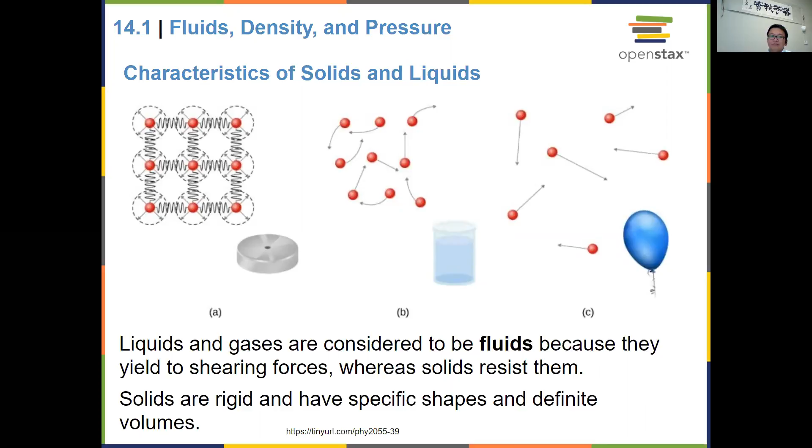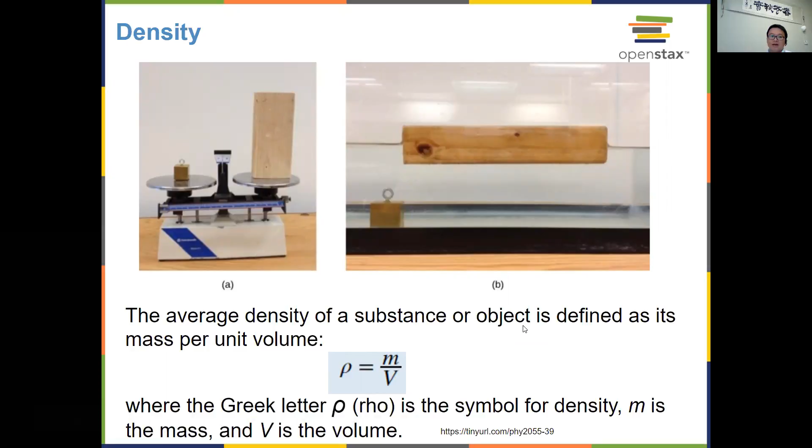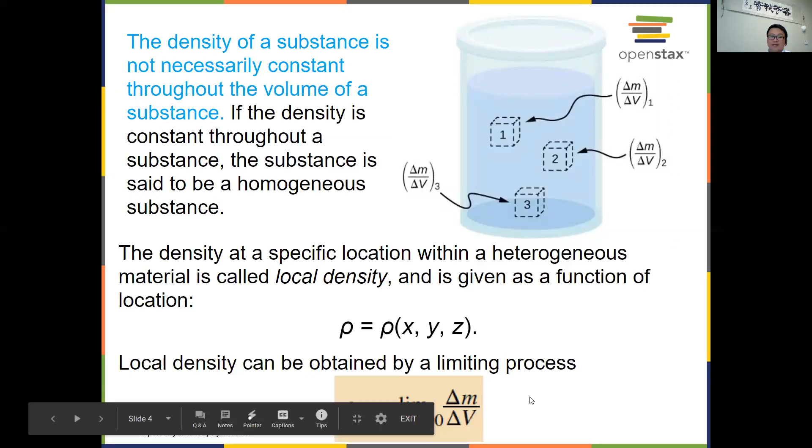We also briefly mentioned the definition for density: density equals mass divided by volume. Density can also be localized, meaning that at a particular local point, your density may vary from other locations. You take a small delta m divided by delta v at that small location, take the limit as delta v goes to 0, and that gives you the local density.

Another term related to density is specific gravity. It's a unitless quantity—the density of the material divided by the density of water at 4 degrees Celsius under normal 1 atmosphere pressure. Keep in mind that when we talk about density, it has to be specified at what temperature and under what pressure—those two conditions have to be specified. Otherwise, if not specified, we're talking about normal room conditions, assumed to be 1 atmosphere and room temperature.

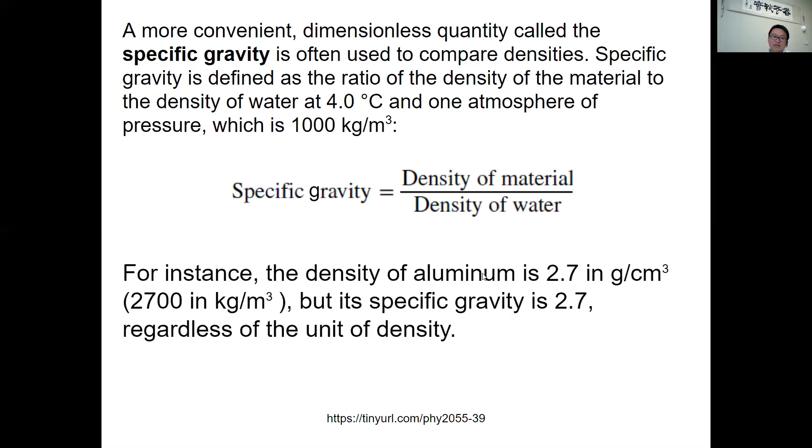We also looked at the definition of pressure as force divided by area. Pressure can also be localized, so at different locations you might experience different pressure. Then you'd be doing the derivative of F divided by the derivative of area.

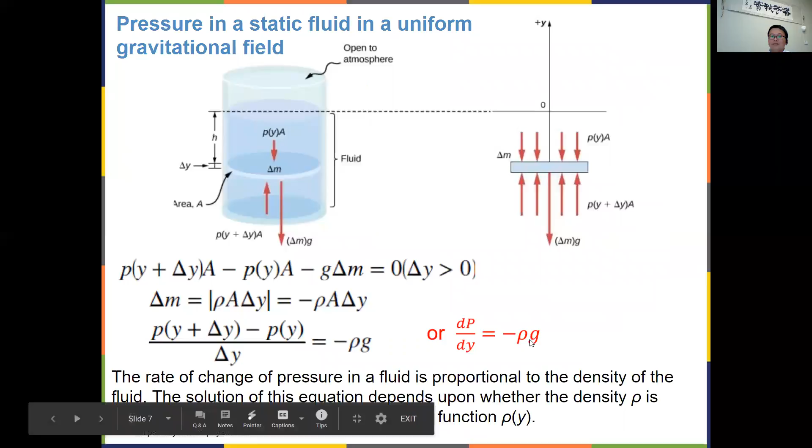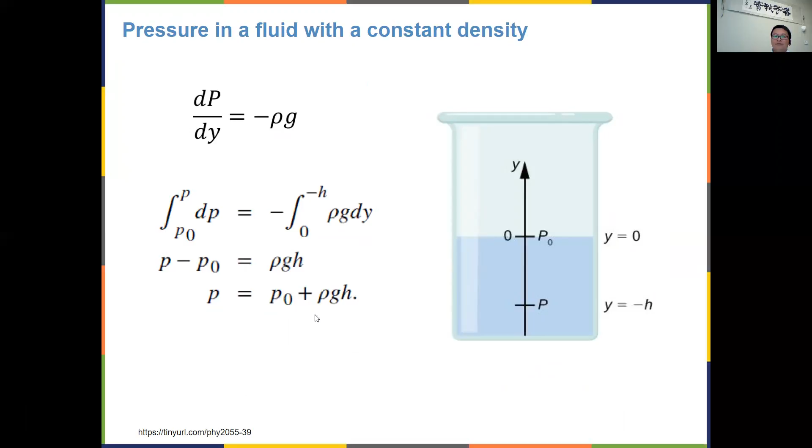Inside a fluid, the pressure varies with location, or with vertical height, due to the weight of the different parts of the fluid exerting on the lower part. So dp over dy equals minus g times rho. That gives you the pressure in the fluid assuming constant density, not changing too much. So pressure inside the fluid equals the pressure on the top surface of the fluid, plus rho g h. That's the pressure inside a fluid.

In the atmosphere on the surface of the Earth, pressure is given by the weight of the air divided by the area at the bottom. The pressure of air decreases as altitude increases—if you go up a very high mountain, you'd expect the pressure to decrease at the top.

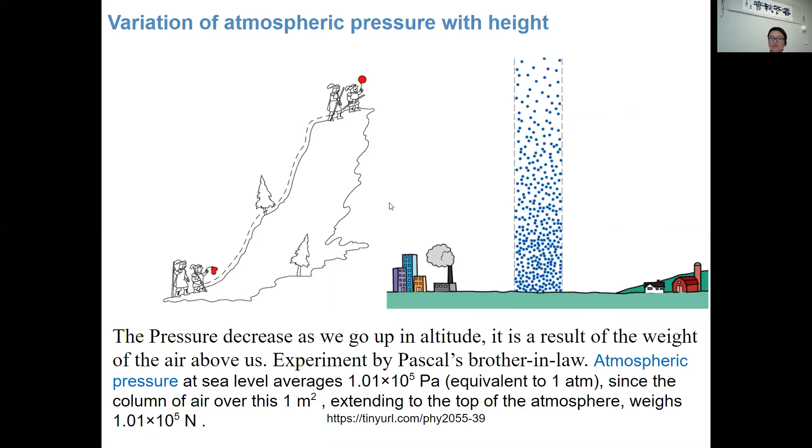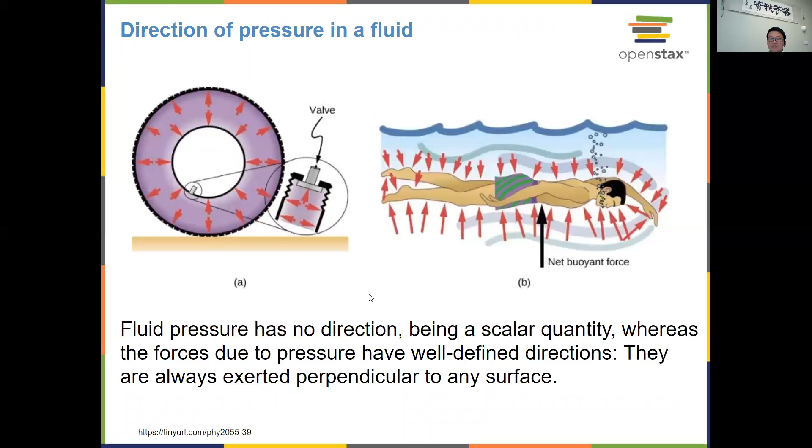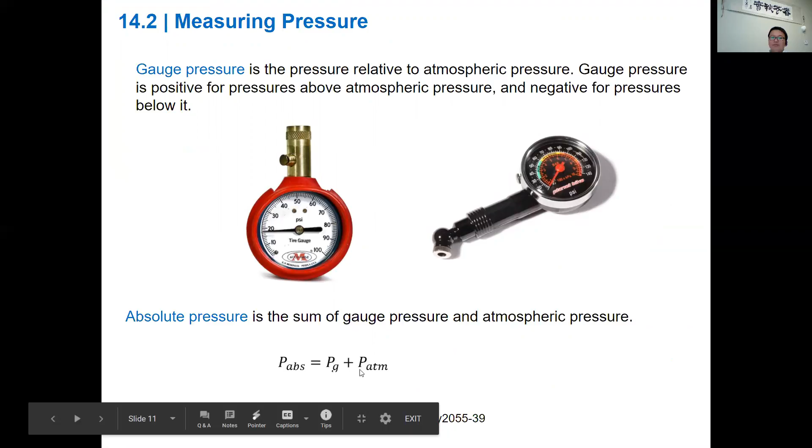Pressure inside a fluid acts in all directions, or we can say no particular direction, so we treat pressure as a scalar quantity. The device used to measure pressure, called a pressure gauge, measures relative pressure instead of absolute pressure. So to calculate the absolute pressure, you do P from the gauge plus P atmosphere.

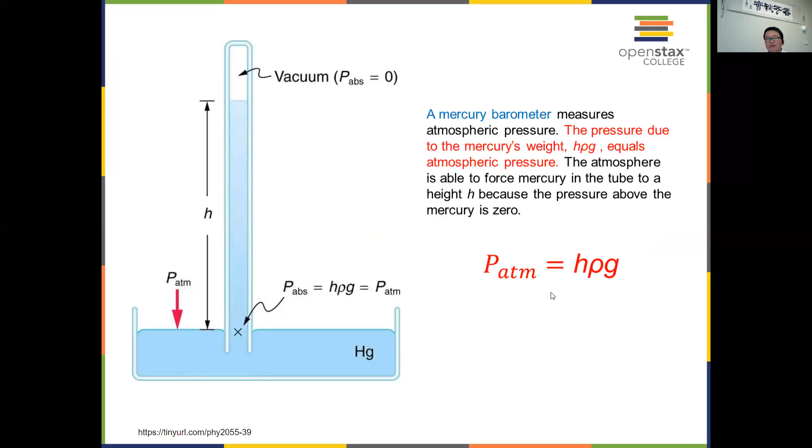In chemistry, pressure is often measured by a barometer—a device like this; we actually have a mercury barometer in the lab that you'll use next semester in physics two. Because mercury is the fluid, pressure equals rho g h, or h rho g, in the same sense. We also mentioned Pascal's principle and hydraulics.

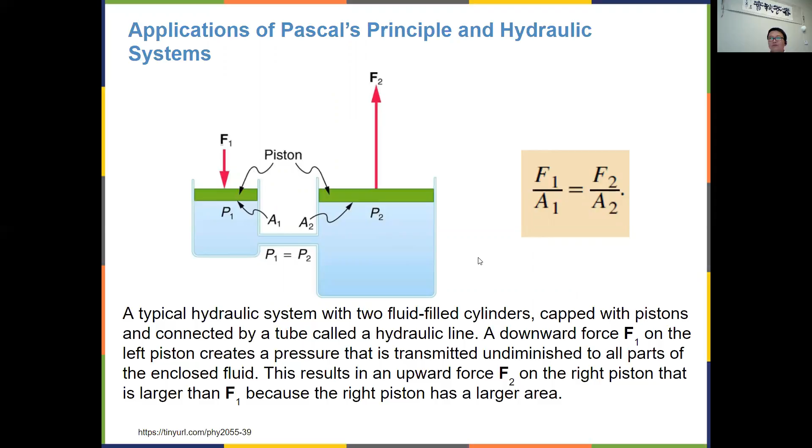Pressure inside the fluid acts in all directions and is uniform throughout. So if you have a change on one side, all other locations inside the fluid should experience the same change in pressure. In that sense, you can design a hydraulic device where you apply a small force and get a relatively larger output force. That's what we learned last time.

Today we'll keep checking a couple more sections in this chapter. The first thing we'll look at is called Archimedes' principle and buoyancy. We know boats usually float in water, while heavier objects like metal sink. Similarly in air, a balloon filled with helium can float. All these objects experience buoyancy forces, an upward force opposite to the direction of gravity.

The origin of the buoyancy force is that when an object is partially or fully submerged into a fluid, the pressure inside the fluid varies depending on the height you are at. For example, with a cylindrical object inside the fluid, the pressure at the top is less than at the bottom. So if the bottom has the same area as the top, the bottom experiences a larger force than the top.

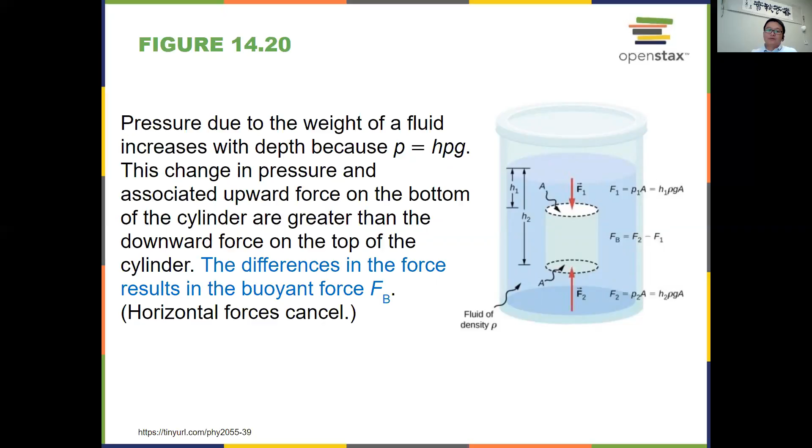Any object inside the fluid should also experience buoyancy in that sense. Now you may have an irregularly shaped object, but if you consider the top half and the bottom half of the object, you can find the difference in forces, which gives you the buoyancy force.

The buoyancy force was originally discovered by Archimedes, and you might have heard the story. The king at that time had a crown made by someone, and he suspected the crown wasn't made of pure gold. So he asked the wise man Archimedes to determine if the crown was made of pure gold or not. But Archimedes didn't have the idea initially, so he kept thinking about it.

One day he was taking a bath, and as his body merged into the water, water came out of the bath. Then he got the idea that you can use buoyancy force to determine this. He realized the buoyancy force acting on an object is equal to the weight of the fluid displaced. That's the principle he discovered, and he applied it to determine the density of the crown, which told him whether it was pure gold. We'll see about that in a couple of slides.

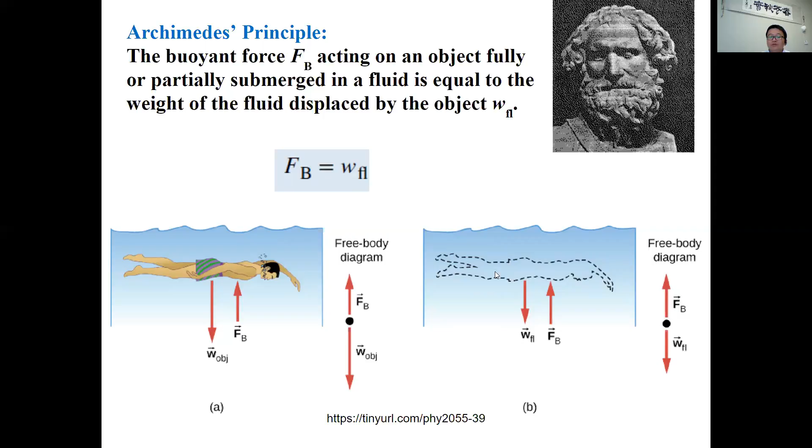Basically, buoyancy force equals the weight of the fluid being displaced. For example, if you're swimming underwater, the buoyant force the water exerts on your body equals the weight of the water displaced by your body. That amount of water's weight will equal your buoyant force.

Let's see how you can determine density by applying Archimedes' principle. If you have an object in water, the weight of the object can be written as mass times g, which equals the density of the object times volume times g. For the fluid displaced by the object, that equals the mass of the fluid times g, which equals the density of the fluid times volume times g. According to Archimedes' principle, the buoyant force should equal the weight of the fluid displaced.

So if you put an object into water or any other kind of fluid, if an object is floating, then these two should be equal to each other. So rho object is not equal to that. Depending on the density of the object, it could have density larger or smaller than the fluid. For a boat, the density of the boat overall should be less than the fluid, so then it's floating.

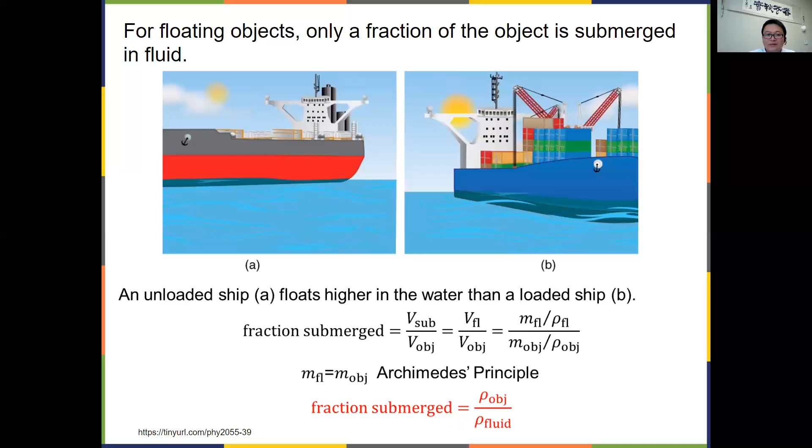If the density of the object is less than the density of the fluid, then it's going to be floating, because the fraction submerged would be less than 1 — meaning only part of it will be in the water. If the object has a larger density than the fluid, then the object will be sinking down, because the portion submerged will be greater than 1. That means it's going down.

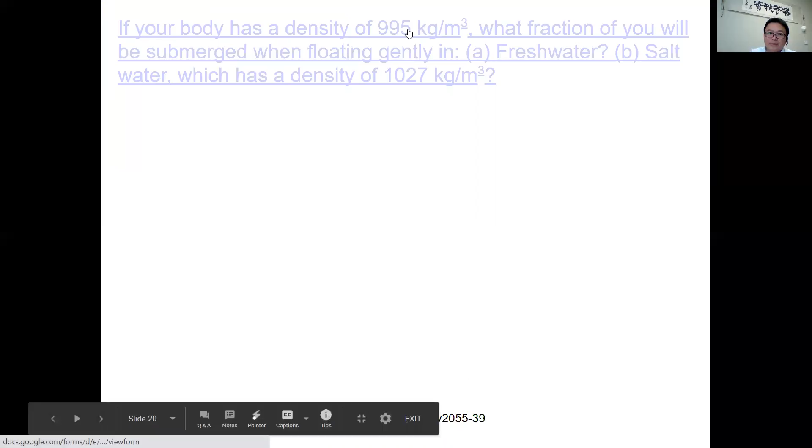So we'll take a quick look at this example here. I think we can go through it together because it's a rather simple one. It says: if your body has a density of 995 kilograms per meter cubed, what fraction of you will be submerged when floating gently in fresh water?

Fraction submerged will be equal to rho of the object divided by rho of the fluid. Your body has 995 kilograms per meter cubed density, and the water is 1,000 kilogram density for fresh water. So then 0.995 — that fraction will be submerged in the fresh water.

For the second part, fraction submerged should again be equal to the object density divided by the fluid density. In this case, 995 is again your density, divided by salt water, which is 1027. That works out to be a little bit less than the previous one, but still 0.969 — that's how much will be submerged into the water.

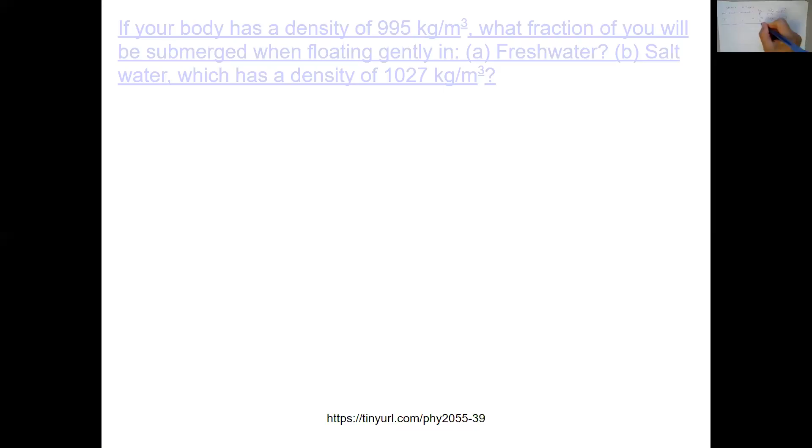Now let's get to the real part — how you can actually determine the density, for example if you were Archimedes. This is how you would do it: you weigh the crown when it's in air, and then you put it into water and take the measurement again for the weight. This time you have an apparent weight, because it's not the real weight — it's the weight in water. By doing these two measurements, let's see how you can figure out the density of the object.

So then that's equal to mg, the mass times g, which would be the weight, divided by the mass of the water times g, which is equal to the weight of the fluid being displaced.

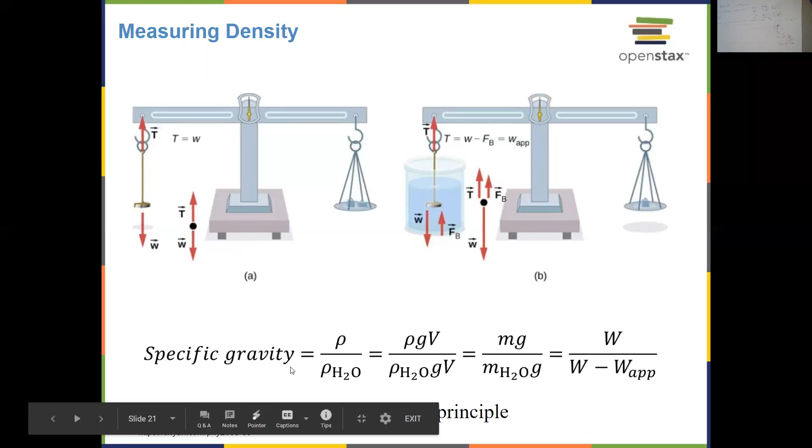So you can see your specific gravity will be equal to your real weight divided by the real weight minus the apparent weight. This gives you the specific gravity, and from there you can calculate the real density of the object.

Let's take a look at this example. A rock with a mass of 540 grams in air — this is the real mass — is found to have an apparent mass, meaning the mass when submerged into water, of 342 grams. Find the mass of the water displaced, the volume of the rock, and its average density.

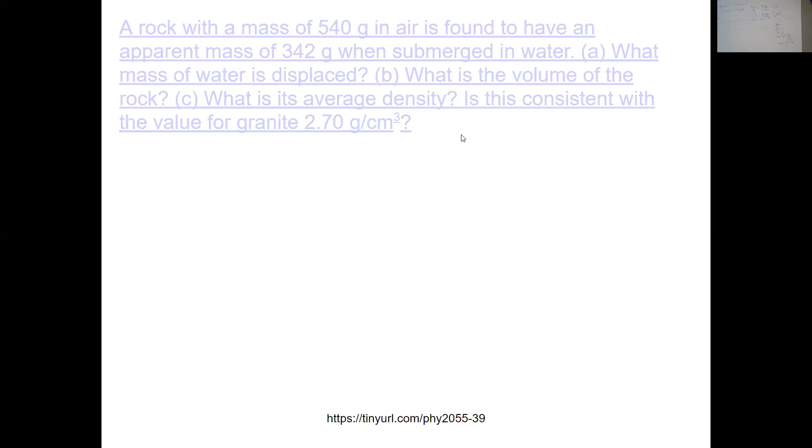All right, so let's take a look here together. I think I see a few responses in already.

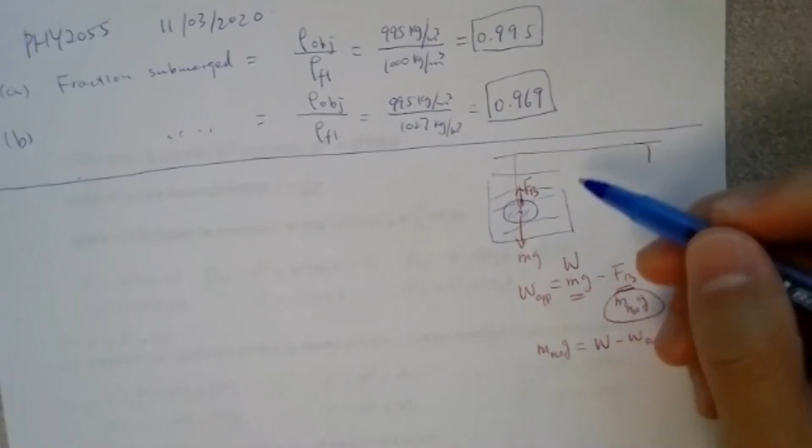Similarly to what I sketched earlier, if you assume this is a rock inside the water, then when you are measuring the apparent mass, it's going to be whatever the mass of the rock minus the mass of the water being displaced, which is equivalent to the buoyancy force divided by g.

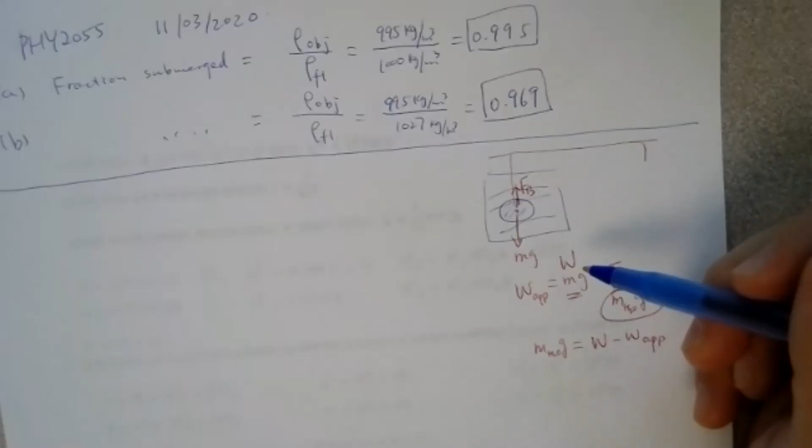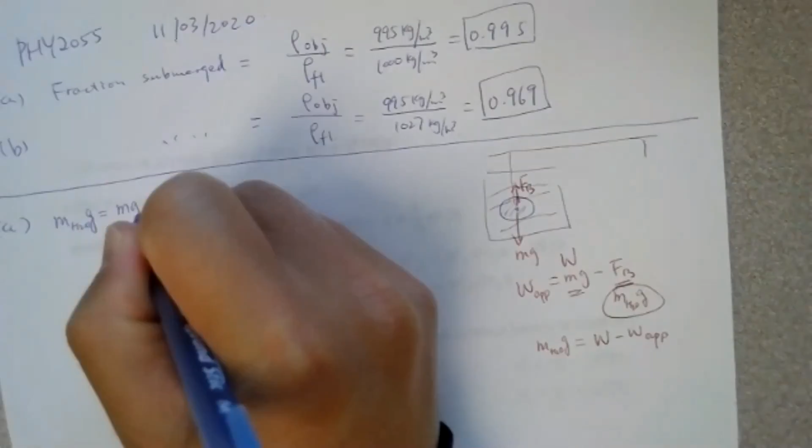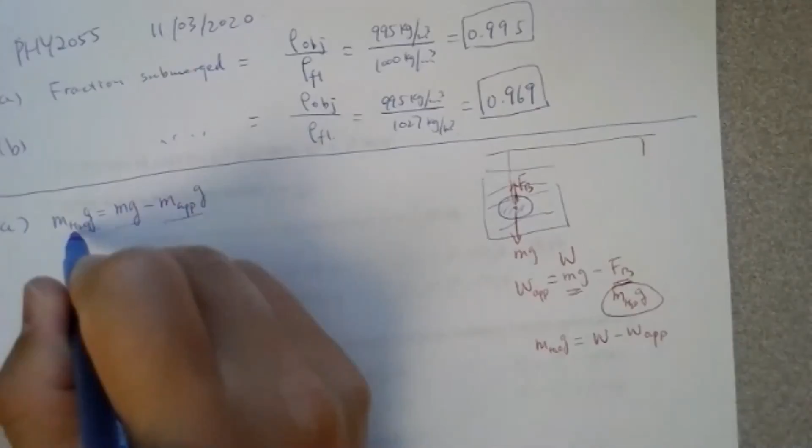So in this case, for part A, m(H2O)g is equal to the real weight mg of the rock minus the apparent weight of the rock. This gives you the weight of the water being displaced by the rock, because m(H2O)g is equal to the buoyancy force. From that free body diagram, you can see this equation.

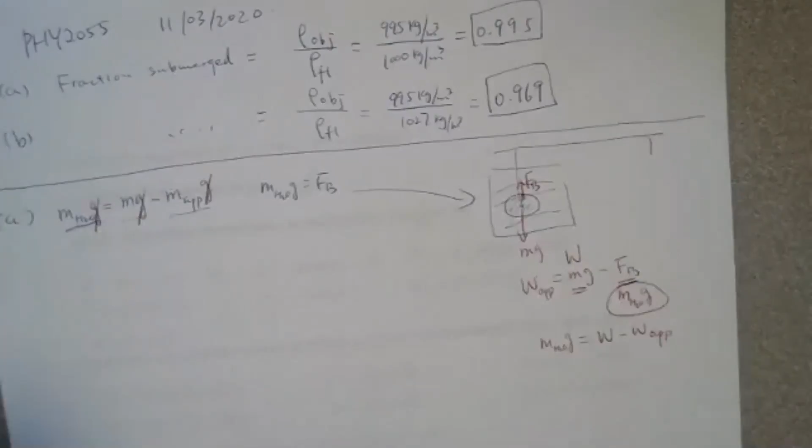So looking for the mass of water displaced, the g's cancel out, so the mass of the water being displaced equals the difference: m minus m apparent, 540 grams minus 342 grams, which gives you 198 grams for the mass of the water being displaced.

The second part asks for the volume of the rock. The volume of the rock should be equal to the volume of the water being displaced, because the volume of the rock takes the place of the water being displaced.

Using rho equals m divided by v, the volume of the water being displaced, which equals the volume of the rock, is the mass of water displaced divided by the density of water. Using density of water as 1 gram per centimeter cubed: 198 grams divided by 1 gram per centimeter cubed gives you 198 centimeter cubed for the volume of the rock.

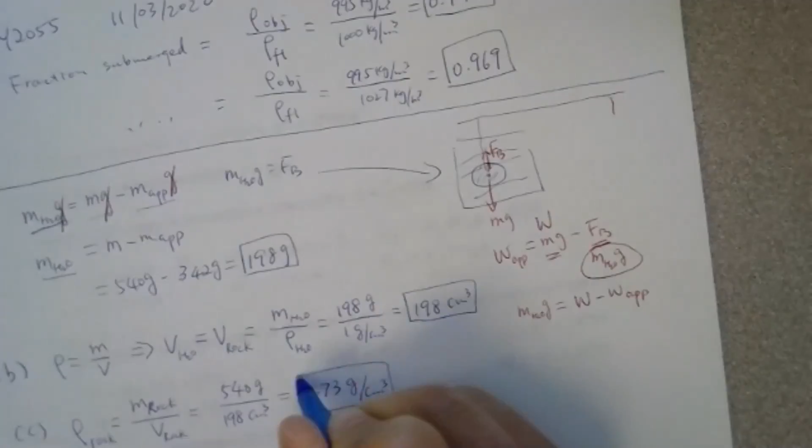So you can use the CGS unit here, or if you want to use the SI unit, then you'll be doing kilograms per meters cube, okay? So I think all your responses are correct, good job on that one. All right, let me know if you have questions on this one.

What was the apparent weight again? So the apparent weight is the weight when you are measuring the object in the fluid. In this case, it will be equal to the apparent mass times G, okay? Because when you are measuring the weight of the object in air, that's the actual weight, right? And when you are measuring it in water, it will be different. That's called the apparent weight, okay?

Now this apparent weight is different because there's a buoyancy force on the object. So you take the buoyancy force out of the actual weight. Thank you, that makes a lot more sense now.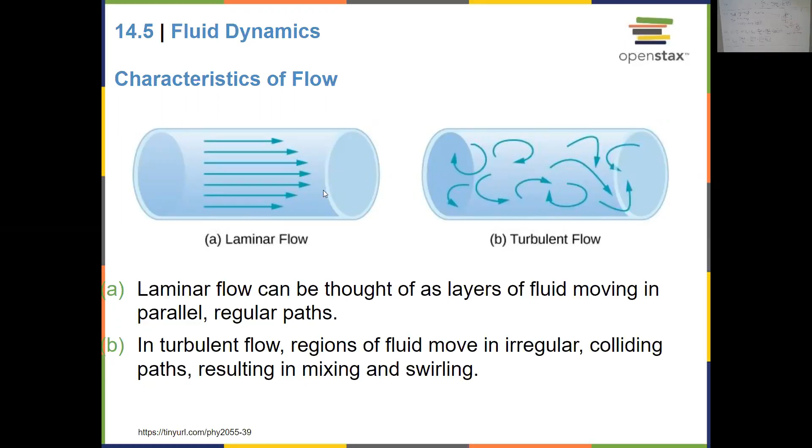Now there's also a second type of flow, it's called turbulent flow, so it actually goes backward. Although for the fluid itself, as a big object or unity, it's going in one direction, but inside there will be small flows called turbulence flows. So those are the two types of flows.

So let's take a look if the fluid is just going in one direction. So what happens is, if you take a part of the fluid here, you can see it's going through a channel over here. So basically, if there's variation in the cross-sectional area of the channel, then in the same time period, this guy, if it goes through one particular point...

Let's say take this cross-sectional area over here. So the amount of fluid going through this cross-sectional area should be equal to the amount of fluid going through a different point. So pick a different point over here, then the same amount of fluid will go through that cross-sectional area. This is called the flow rate. So if you do volume of the fluid divided by the time t, that's called flow rate. So flow rate at one point should be the same as at the second point, okay?

Just for right now, let's focus on the quantity flow rate. It's change in volume divided by change in time t. And change in volume can be calculated as cross-sectional area times the length it traveled. If the cross-sectional area doesn't change, then it's the area times dx over dt, which gives you the speed of the flow. So area times the speed is also equal to flow rate.

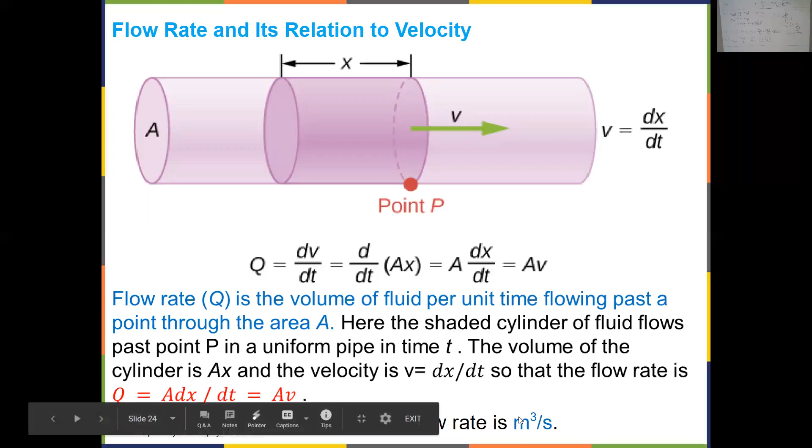Now pay attention: flow rate is defined as the volume divided by time t, and it can also equal area times velocity or speed. The SI unit for flow rate is meters cubed per second, because it's volume divided by time t.

So as I mentioned, at one point compared to another point in the flow, the same amount of water should go through a particular location and then at a different location. This is called the continuity of flow. So the same amount of water entering from the upstream should be equal to the same amount of water coming out of the lower stream. So this is called continuity of flow.

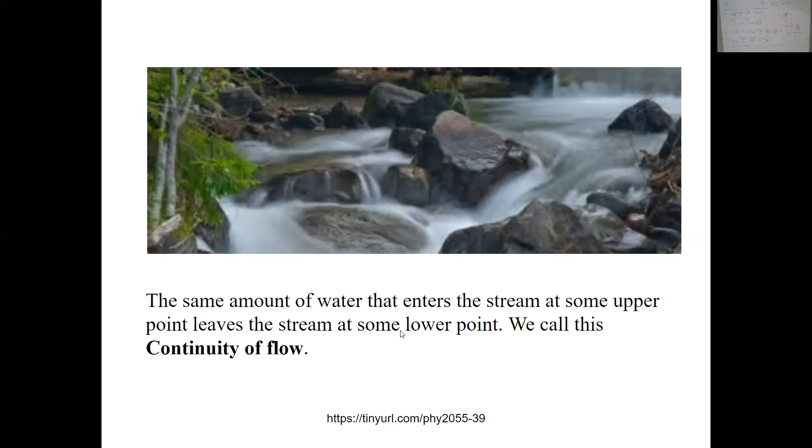This also happens when you have a change in cross-sectional area of the pipe. If flow of water goes through here, it has to come out at a different point later on. If the cross-sectional areas are different, then A1 V1 is equal to A2 V2.

Because the same amount comes in should be equal to the same amount comes out. So basically you do A1 times X, the amount would be equal to A1 V1 times T, equals A2 V2 times T. The T cancels out, so the formula for continuity of flow reduces to A1 V1 equals A2 V2.

Here, A is the cross-sectional area, V is the speed at different locations. If you have a larger cross-sectional area, the speed will be smaller than if you have a smaller cross-sectional area. V2 will be larger at that point when A2 is small.

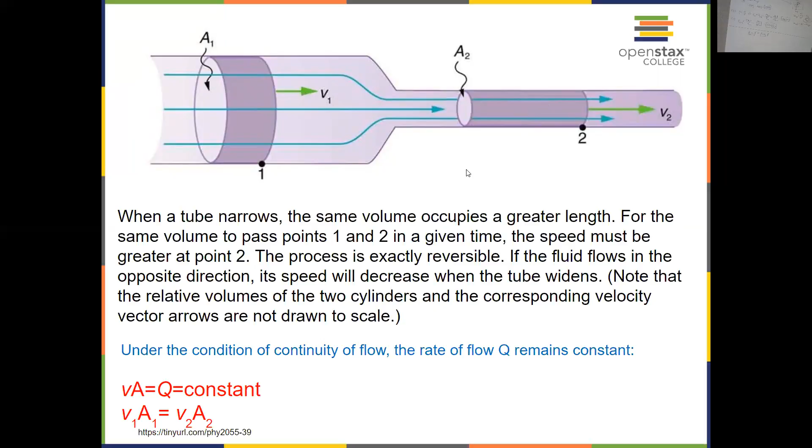Let's take a look at one example. The Huka Falls on the Waikato River is one of New Zealand's most visited natural tourism attractions. On average, the river has a flow rate about 300,000 liters per second. At the gorge, the river narrows to 20 meters wide and averages 20 meters deep. What's the average speed of the river in the gorge? And what's the average speed of the water in the river downstream of the falls when it widens to 60 by 40?

For flow rate, I think we use Q, that's equal to A times V, the area times the speed. And according to continuity of flow, A1 V1 will be equal to A2 V2. I'll have you guys work on this and then we can take a look at the solutions together in a couple minutes.

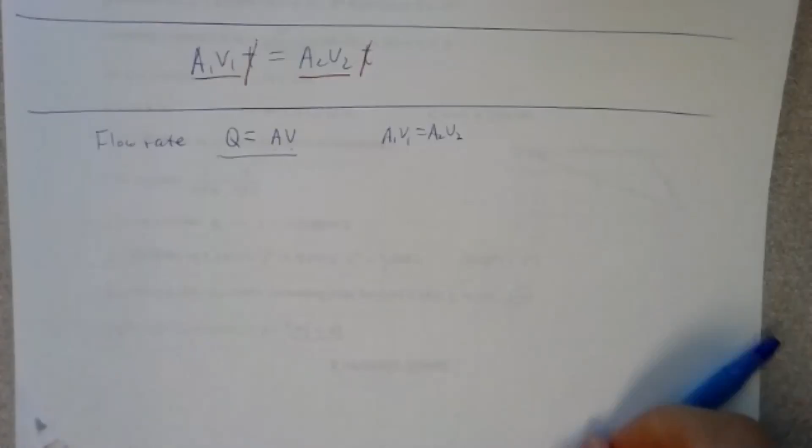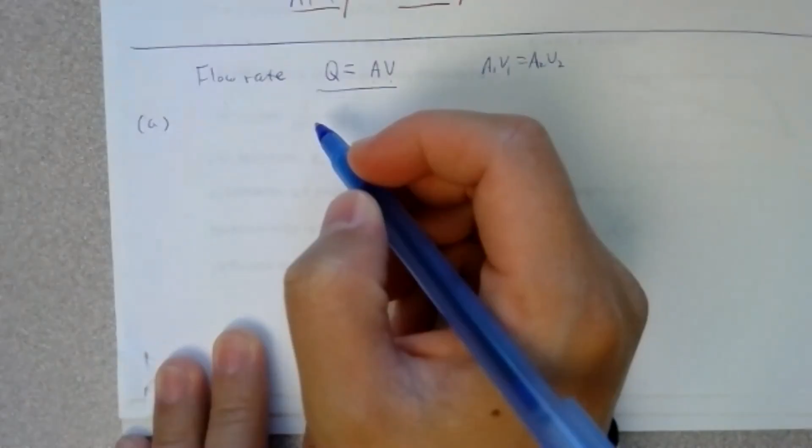Let's take a look at this one together. You're basically going to apply this equation. It tells you the flow rate, and then the dimensions at one location, so we are looking for speed. The speed should be equal to flow rate divided by the cross-sectional area. So this is 300,000 liters per second divided by the area at the first location, 20 meters times 20 meters.

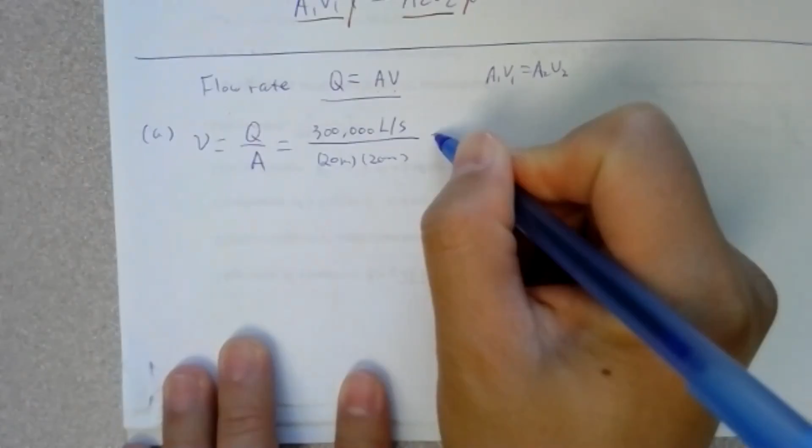You want to be careful about units here. This is given in liters, so you probably want to convert it into meters cubed first. 1 meter cubed is equal to 1,000 liters. So that would be 300 meters cubed per second divided by 20 meters by 20 meters. This will give you 0.75 meters per second.

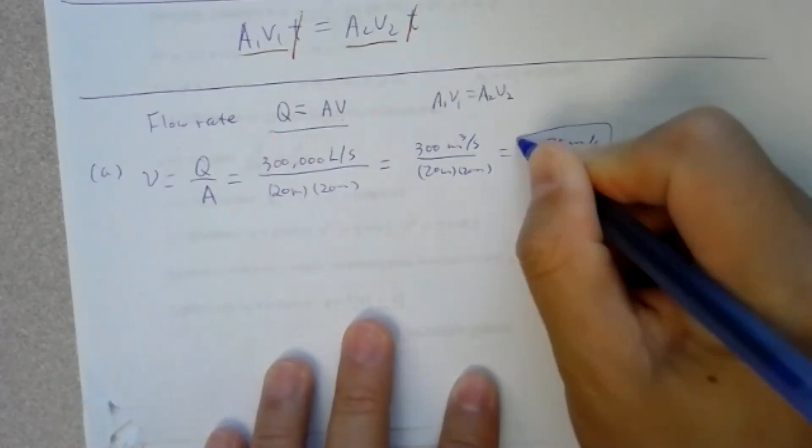You can use the same equation for the second part, you just change the area. So this is V1, A1, then V2 would be equal to Q, the same Q, divided by A2. Again, 300 meters cubed per second divided by, in this case, it's widened to 60 meters by 40 meters. So then it's equal to 0.125 meters per second. You can also use that equation if you want on this part, so the same result you'll get.

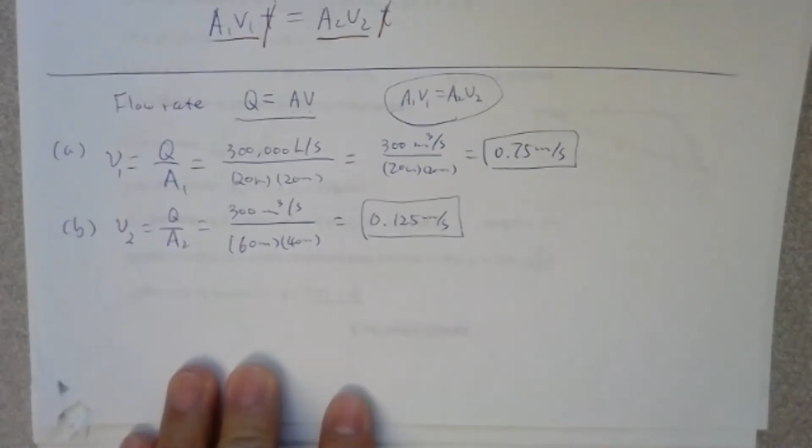If not, let's recheck on the continuity of flow. So it's basically mass conservation. The amount of water that comes through one point should be equal to the amount of water that comes at the second point. So that's basically conservation of mass, the mass doesn't change. So if you look at it from the point of mass.

Mass equals rho times volume, which is equal to rho times cross-sectional area times X. So dm over dt, the change in mass, should be the same at one location compared to another. dm over dt will be derivative of rho times A times X. If the cross-sectional area doesn't change and rho doesn't change, then it'll be just equal to rho times A times dx/dt. dx/dt will be the speed, so then rho times A times V.

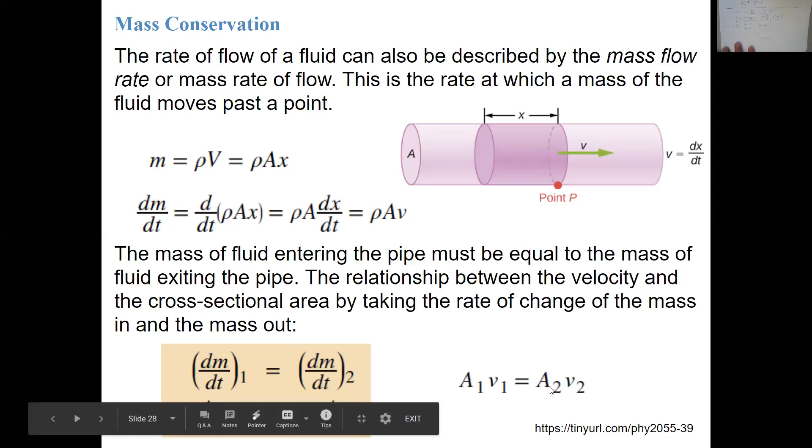So at one location, this is assuming A is not changing. Now A could be changing. So at the end, if you are at one point, dm/dt is equal to rho A times V, and at location 1 it will be rho1 A1 V1, at location 2 it will be rho2 A2 V2 as indicated here. Now the density is probably not changing, so the density can cancel out, rho1 and rho2 cancel out. So then the continuity flow equation becomes A1 V1 equals A2 V2.

All right, so that's that section. Now let's take on the next section in the textbook here, Bernoulli's equation.

So if we are looking at one part over here, if this is a larger cross-sectional area, this is smaller cross-sectional area. You can see a larger cross-sectional area, V1 is smaller, V2 over here is larger. So when this amount of water in the shaded volume here moves to the second location, you can see the velocity or the speed changes, right? The speed increases in that sense.

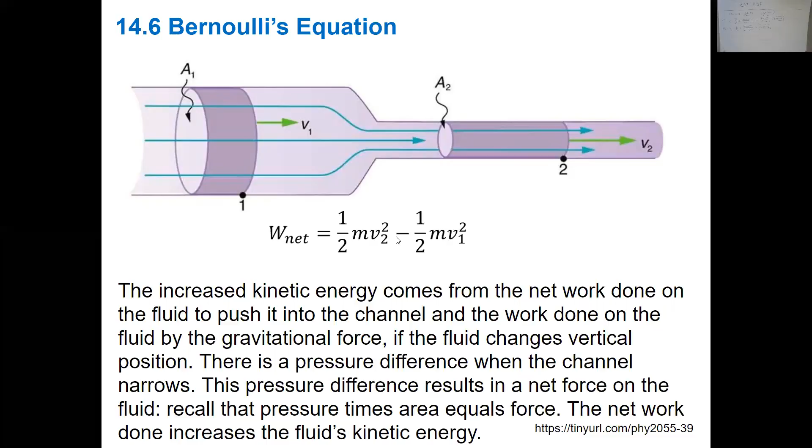So then let's apply the net work to this volume of water. Net work is equal to the kinetic energy change. All right, so then let's take a look here.

So if you are looking at one location, on the previous figure, the two locations are at the same height. Now, in reality, the two locations might not be at the same height, right? It could be like in this place and then at second place, Y1 here, Y2 here. So in this case, from position 1 to position 2, there's change in kinetic energy and also change in potential energy. That would be equal to change in the work. Or the net work should be equal to change in kinetic energy plus change in potential energy.

So in the figure shown here, you can see there's force applying on this side, and at the same time, there's force applying on that side. So the net change in work should be equal to F1 times dx1 minus F2 times dx2. And F1 will be equal to P1 times A1, F2 will be equal to P2 times A2. So A1 times dx1 will be the volume change, dV, and A2 times dx2 will be the volume change as well. So you can see this is due to the pressure difference at the two ends of this channel. So the pressure difference times the change in volume, that equals to the change in work.

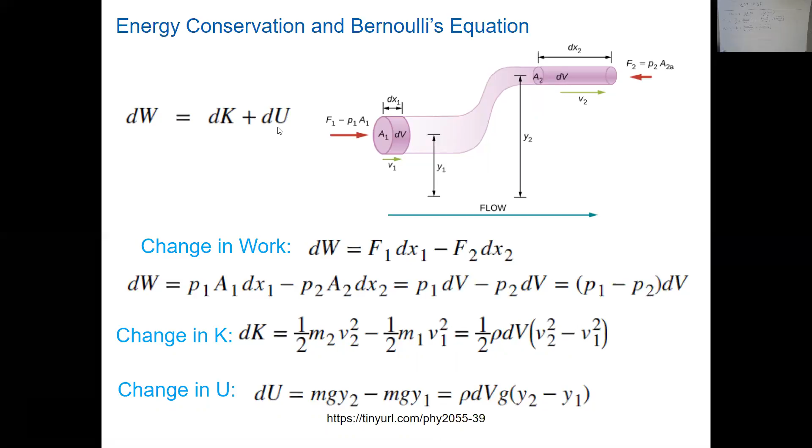Now change in potential energy would be mg y2 minus mg y1. Again, the mass is the same mass, so rho dV, that's the mass times g times y2 minus y1. We will take those three expressions into this equation on top here: expression for dw, expression for dk, and expression for du. All right, so then this is what we got.

So then P1 minus P2 dV equals to 1/2 rho dV times velocity, the lowercase v stands for velocity, V2 squared minus V1 squared, plus rho dV g times y2 minus y1. dV is the same dV across, so that cancels out. So then you have P1 minus P2 equals to 1/2 rho V2 squared minus V1 squared plus rho g y2 minus y1. So if you rearrange the terms, everything denoted as 1 to one side of the equation, and the rest denoted as 2 to the other side of the equation.

So you arrive at this expression here called Bernoulli's equation. P1 plus 1/2 rho V1 squared plus rho G Y1 equals to P2 plus 1/2 rho V2 squared plus rho G Y2. So initial equal to final, or you can say it's constant, it's not changing. So then P plus 1/2 rho V squared plus rho G Y is equal to constant. So that's basically Bernoulli's equation.

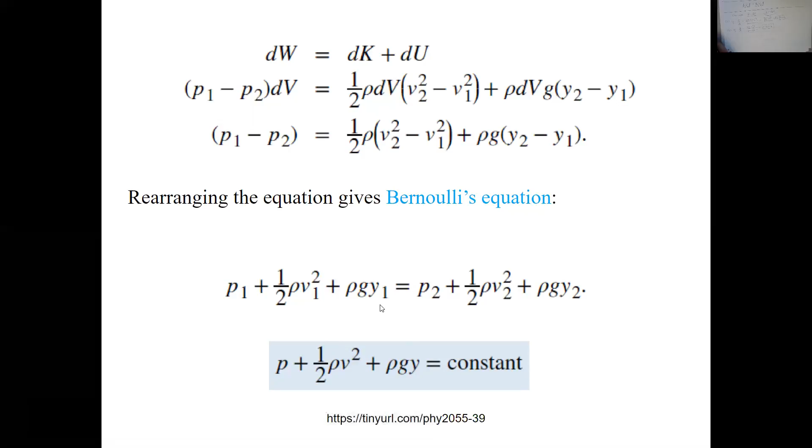All right, let's take a look at different scenarios. So if the fluid is in a static situation, then we are having static fluid and it's not moving. So then velocity equals to 0. V1, V2, they are both equal to 0.

So then for Bernoulli's equation, let me write on my paper so we can refer to that. It's P1 plus 1/2 rho V1 squared plus rho GH1 equals to P2 plus 1/2 rho V2 squared plus rho GH2. In a static liquid fluid situation, you have this term and this term as 0. So then Bernoulli's equation reduces to 2 terms on each side of the equation.

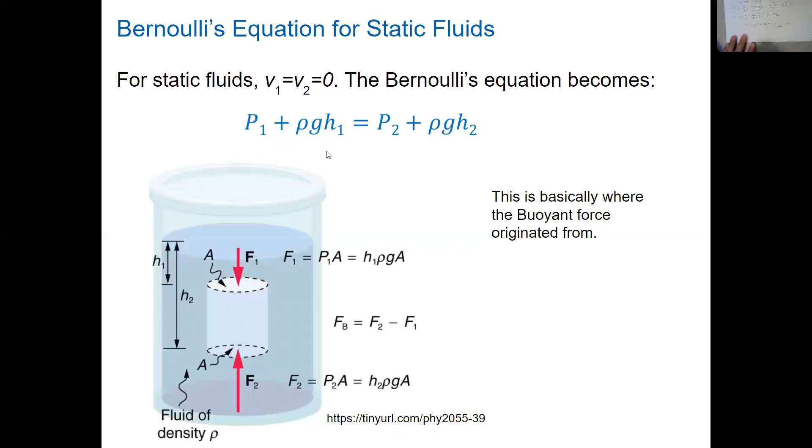If the two locations are the same height, H1 equal to H2, then this term will cancel out: rho GH1 cancels rho GH2 on the right-hand side. So Bernoulli's equation reduces to two terms on each side: on the left hand side, P1 plus 1/2 rho V1 squared, and on the right hand side, P2 plus 1/2 rho V2 squared. When the height is the same, this is called Bernoulli's principle.

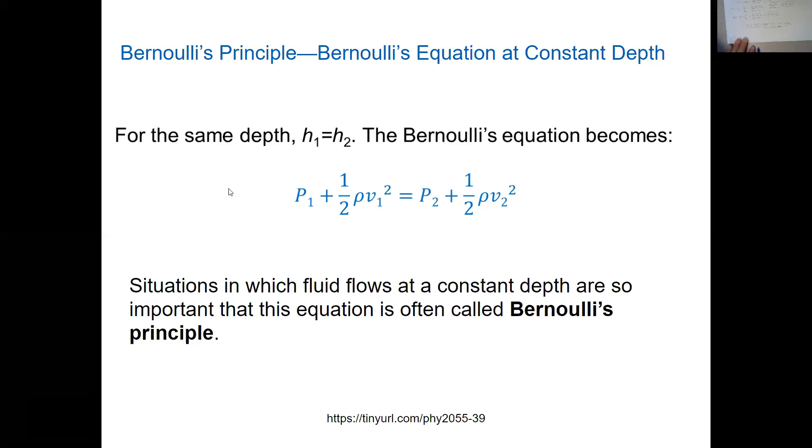Now let's look at some applications of Bernoulli's principle. You might wonder how an airplane, such a heavy object, can fly in the air. This is because of the design of the wings: the top of the wing is curved while the bottom is straight. So the air going over the top of the wing travels a longer path than the air passing under the bottom.

That means the velocity of the air on top of the wing is larger, while at the bottom the velocity is smaller. According to Bernoulli's principle, the height term goes away, so if you have a larger velocity squared plus P1, that must equal a smaller velocity squared plus P2. So P2 has to be larger than P1 for the equation to balance. This means the pressure underneath the wing is larger than the pressure on top, creating a net force from bottom minus top, which provides the lift for the wing, and the same happens on the other side.

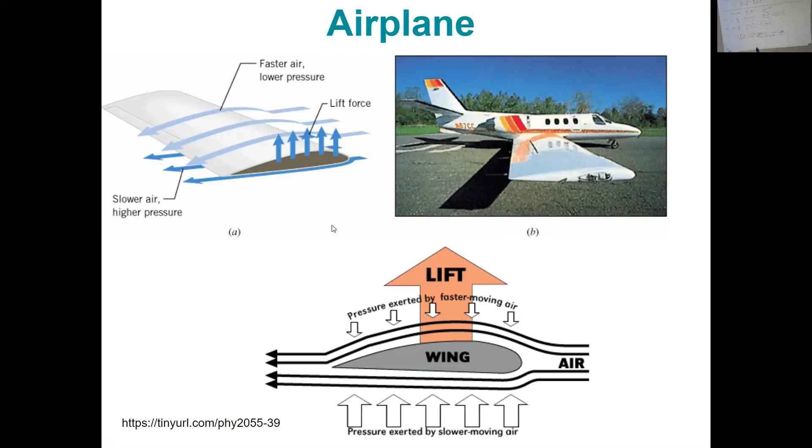I think you guys will get a practice problem in the homework assignment on this, to calculate how much force is actually produced for the airplane when it's flying. But that's the principle there.

Also, if you have a perfume bottle and want to smell it, you can blow some air across the top. This creates a velocity for the air molecules there, so the pressure there becomes smaller, and the perfume will be pushed out because of the pressure difference.

Also, if you go to the dentist, there's a tube in your mouth sucking water out. That's also because water runs through it, producing lower pressure inside, while the outside pressure is larger. So it can take in air or liquid, pushed by the pressure difference inside.

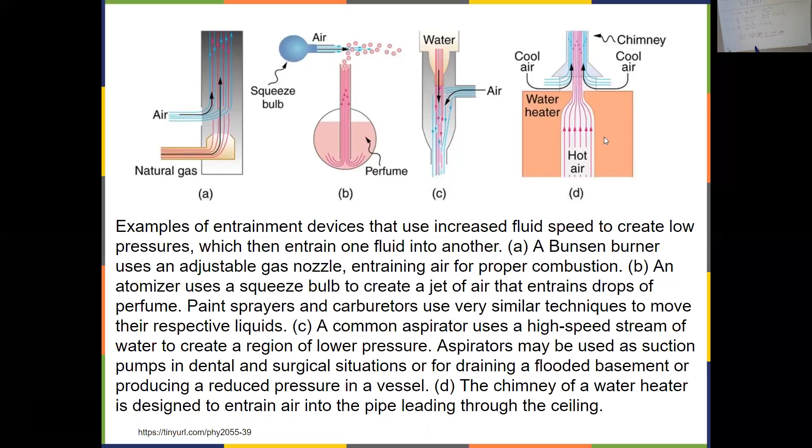For a chimney as well—if you're burning something, hot air goes out through the chimney, then cold air gets pulled in because the air pressure inside the chimney is smaller than the pressure outside. So that works the same way.